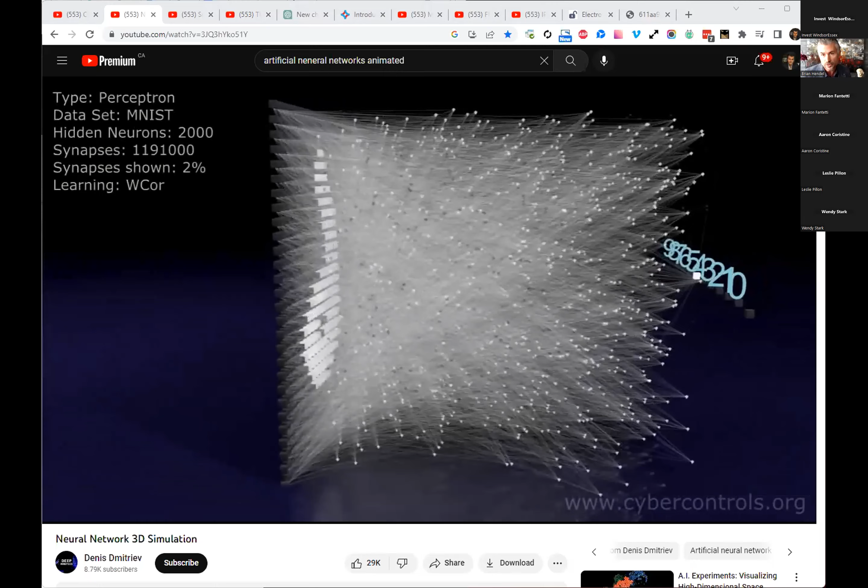So what do we mean when we say AI? Certain things humans do exceptionally better than traditional computers - we think abstractly, we're creative, we do pattern matching. So computer scientists decades ago said, why don't we try to build computers like human brains, using artificial neural networks instead of the squishy meat ones we all have. And out of that has come some pretty amazing stuff.

Probably some of you have heard of Midjourney and Stable Diffusion. This is AI generated art, truly novel creations from an AI system. This is crazy for someone like me who's used to a lot of traditional if-this-then-that type programming. We never expected creativity to be emerging from AI so early.

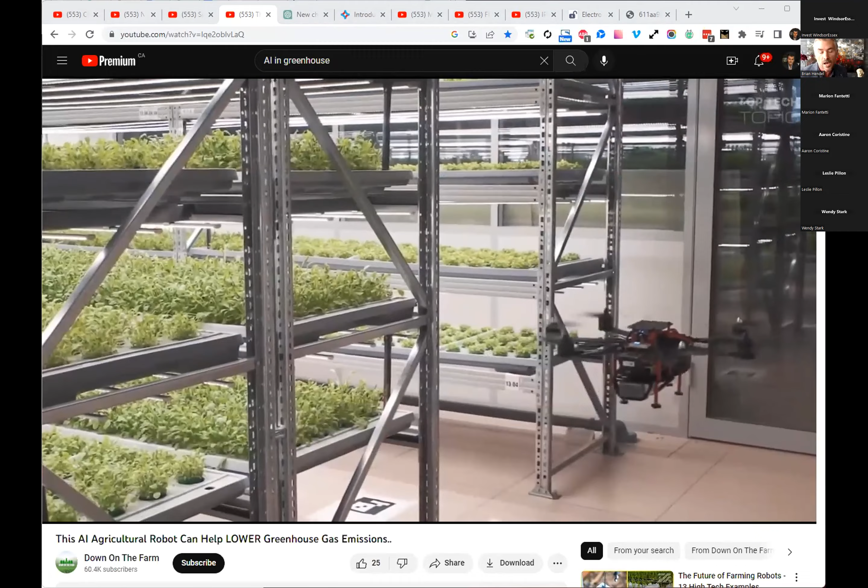So well, what does this mean for ag? Like, this is pretty pictures, that's fine, but what does this actually mean for the agricultural industry? AI is a huge term touching almost every sector right now. In the greenhouse specifically, you've got AI interacting with robotics, self-driving equipment. We see this locally at some of the bigger growers out in Leamington, automated pickers.

So things you're seeing in this video, right? But the things that I personally find most exciting are the opportunities in more of the thinking activities - things that are less robotics and more happening in the grower's brain.

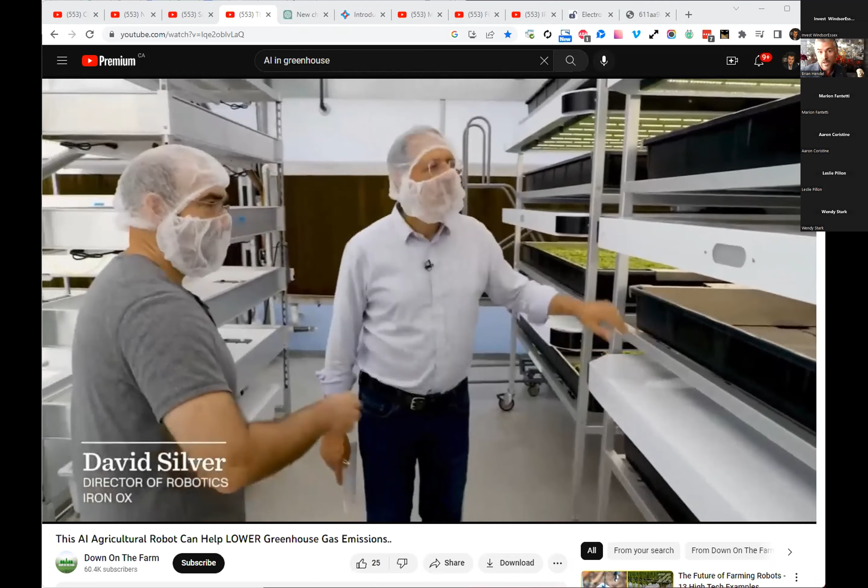I've been told there's some growers in the room, so you'd know that running an operation in a greenhouse or field takes a lot of thinking or expert activities. These involve planning and yield prediction, pest and disease diagnosis, and grower decisions like optimizing fertigation and lighting. There are initiatives underway right now to augment these experts in almost every one of these areas - in many cases to empower them, in some cases to actually replace certain human processes within the facilities. So there's a lot of exciting things happening.

But really I want to talk about some practical examples of AI around the more thinking activities here. This is fun if it's going to work. Some of you probably have heard of ChatGPT - it's what's called a large language model.

Basically, in a rough sense, this means we have a virtual brain that has been trained on a huge amount of text, research papers, articles. But I just discovered - did you know it was also an amateur grower? So let's see if we can pose it a question here. I just wrote up a question.

So: pretend you are a professional grower growing cucumbers for an industrial greenhouse. Your cucumber is at the fruiting stage, and your scouts have indicated there is powdery mildew showing up on the leaves. What would you recommend? So I'm posing this artificial brain a question now - and again, this is not an agricultural product at all, just a brain, an artificial brain that knows a lot of things. You can see it's actually writing a response in real time.

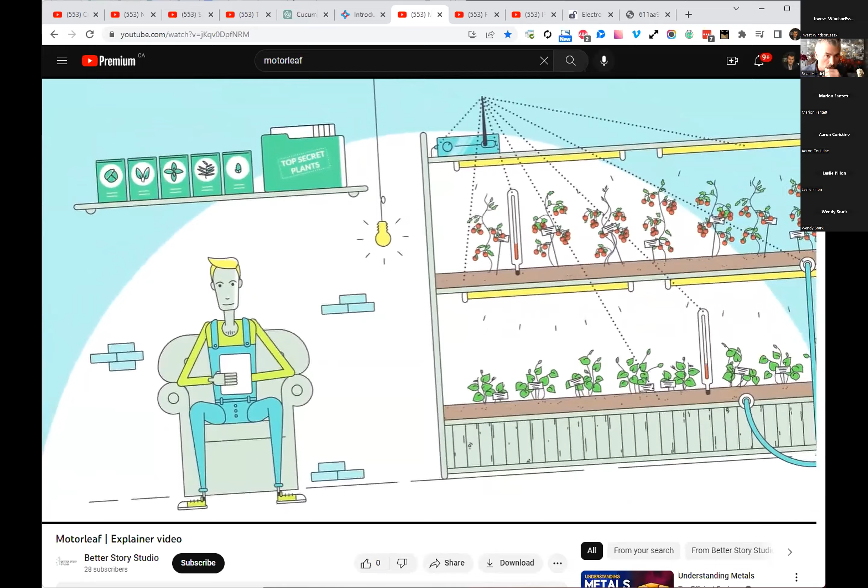An example of a product company that we actually did work for out of Montreal a few years ago, Motorleaf. This is just one practical example. It's a little more related to the back office. So the growers in this room would know farms have a bit of a problem.

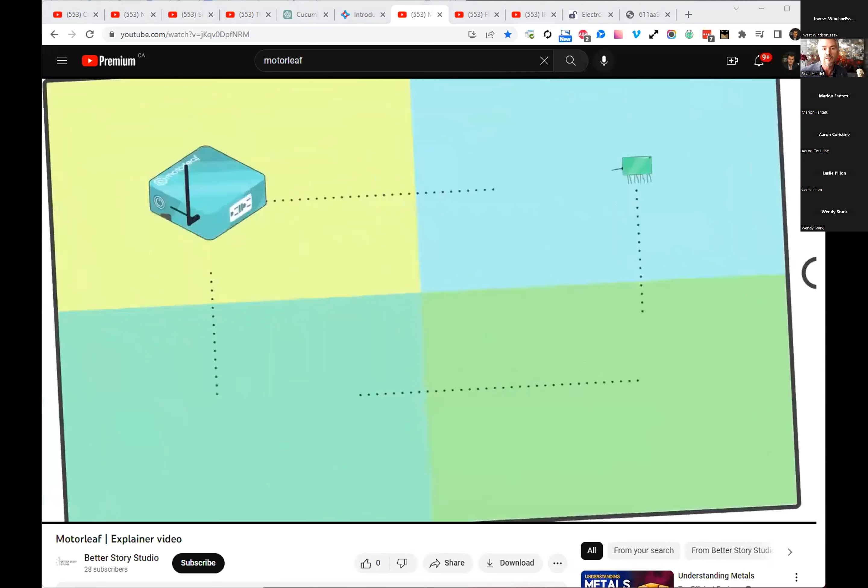They need to figure out what their yield is going to be, right? They've made commitments on contracts and they need to know what the output is going to be. So it's tough for them to do that, and they use their own gut instincts.

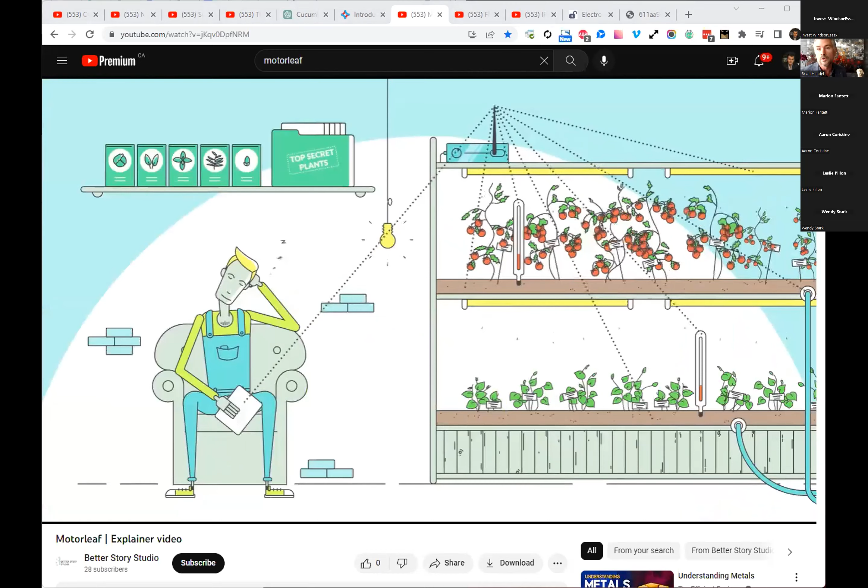So Motorleaf was one example of a product that took all the sensors within the facility, all the light information, the soil pH, fertigation, lots of historical data, and used AI to then predict yield, to give growers, to give their sales team the information necessary to make better informed decisions. This is actually honestly a lot harder than it looks.

We were kind of boots on the ground there, and we realized just the amount of raw data, the huge amounts of historical data. Any faulty sensors in that facility give incredibly erroneous data into the model, and it's really, really a problem. So there's a lot of challenges, but this work is actually happening in the field.

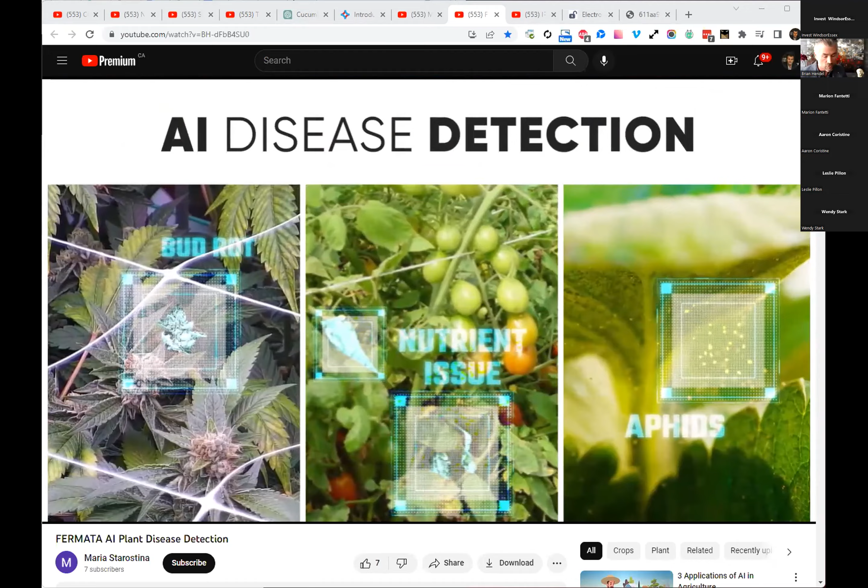Another practical example, a company that we've been in talks with as well, they're trying to install sensors, or rather cameras, all over the roof of greenhouses in order to watch the crops all day long. So imagine a grower who's looking at plants continuously and looking for signs of stress, pest detection, bud detection, if they're in cannabis, looking at where the buds are starting to exist in the field.

However, again, these types of solutions get very expensive. You have a lot of money invested in camera systems and a lot of processing power churning through huge amounts of data. We're talking hundreds of gigabytes a day. You have to then have servers on the farm because you can't move that kind of data off premises through the internet connection of a lot of these facilities.

So let's look at how AI is changing existing products. And I'm going to use an example of our product here, actually. So I'm the co-founder of IPM Scout Tech. So we built a crop health management platform for greenhouses, helping these facilities track their pests and diseases. And we've built an app to help scouts out in the field uptake their information.

So we are currently in the process of helping to detect pests automatically. So instead of having to count pests manually on sticky cards, we're working with technology that can help identify what those pests are and how many, so that they can make better informed decisions to help fight those pests out in the field.

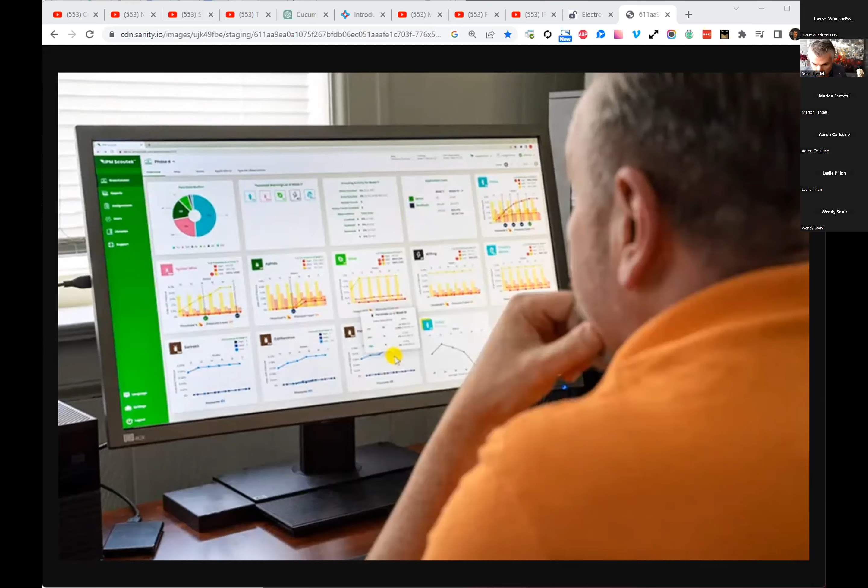I'll be honest, I've been in software for over 20 years. I've seen innovations happening all the time, but I've never seen a single major change or innovation in my field that seems like it is changing every vertical in a brand new way that has a huge potential to change the fundamentals, right? So give you some context about ChatGPT as an example.

It's still in beta. Like what you saw there is not even officially released, right? So it's writing poems. I used it to create Christmas poems for my family last year, and it was tons of fun.

It's gone from version 3 to 4 in 6 months, and during that time, cognition has gone off the chart. It went from passing the bar exam at the lower 10% to the upper 90%. Think about that for a second. This is just asking this generic knowledge base. Again, it's not an ag product, it's not a legal product, it's a generic artificial brain, able to pass very difficult human tests better than most people.

That's mind-blowing. Now it's able to accept images. So you could say, hey, I have a plumbing issue. Here's my plumbing. Can you make some recommendations specific to me? Try to imagine visualizing that out into the agricultural space. So again, just examples of where things are going, not that the product is going to specifically be used there, right?

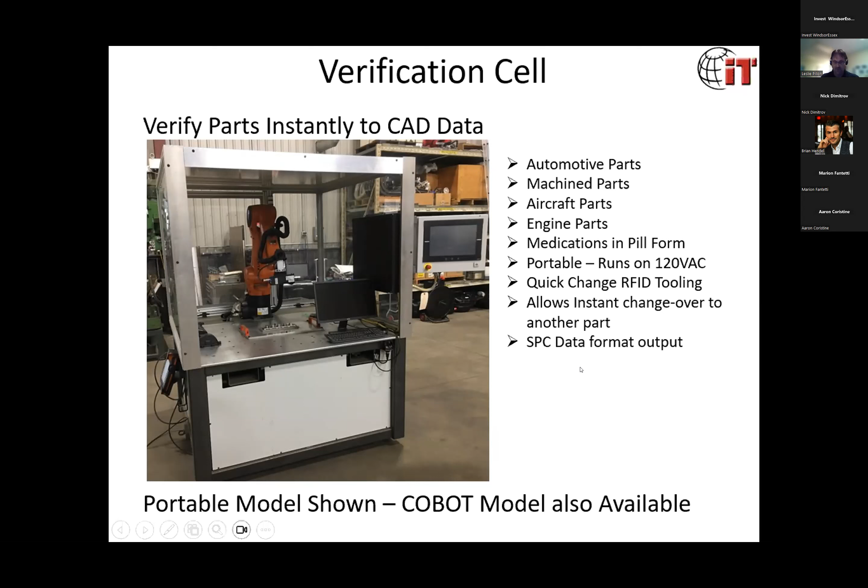So the fixture you see here can be changed instantly to run different parts. As the fixture is installed in the machine, it automatically recognizes which part it is through use of an RF tag, and the machine self-configures to that new part. Essentially, imagine a plastic injection facility during startup on a Sunday, where they have to do first-offs on the parts — CMM checks take a long time. This machine can literally do first-offs on all your parts within minutes. So it's a very cost-saving and time-saving type of product.

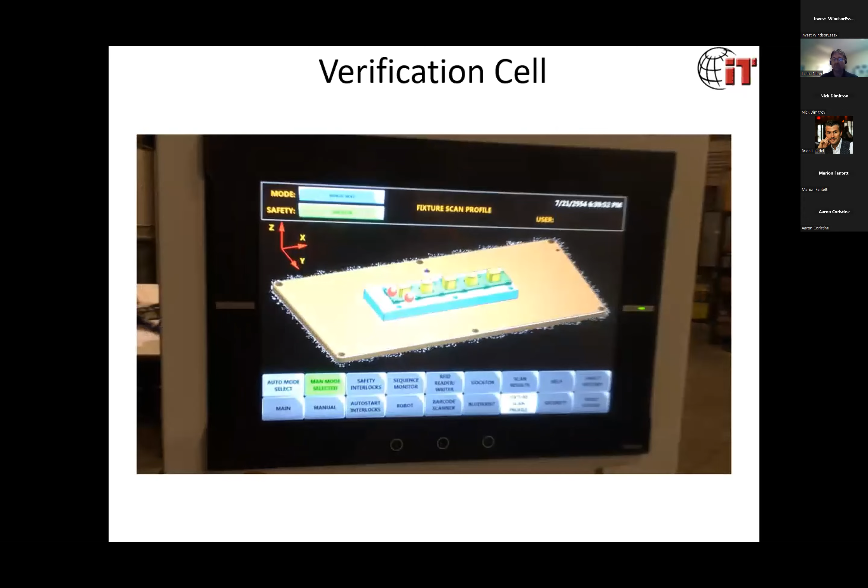This is an example of a scan. Here we have a fixture. We're scanning across it, and within seconds we'll have a 3D rendering of that part, where we can pick certain key points and compare it to the CAD data and either pass or fail on those data points.

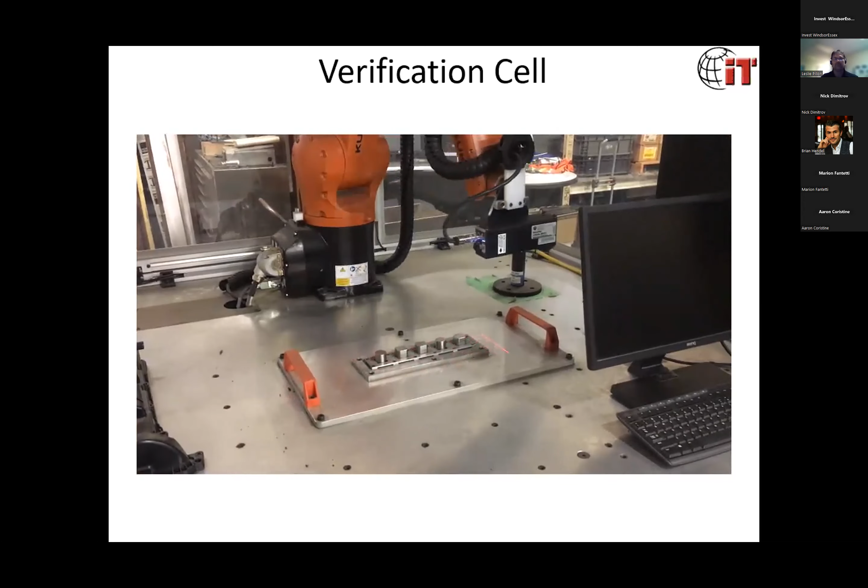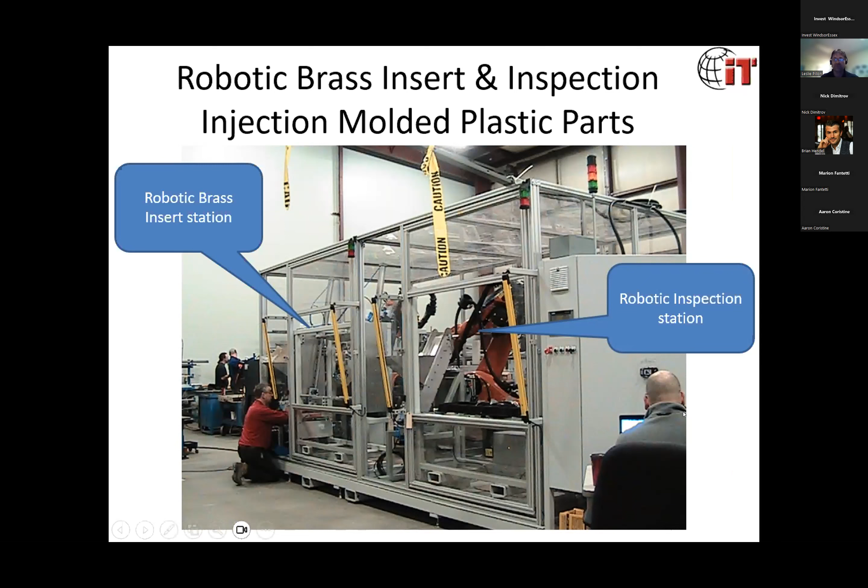Another recent machine we built is this one here, which gives you an idea of our capability at Innovation. This is a robotic brass insert cell, and it installs brass inserts by heat staking into valve covers. All this machinery is built here at our Stony Point location. We have a robotic brass insert station and also an inspection station. Two robots are used in tandem to install the brass inserts, and one station also does the inspection of the inserts. We have to make sure the inserts are not inserted too deeply into the valve cover, and are fully inserted flush — not too deep and not too tall.

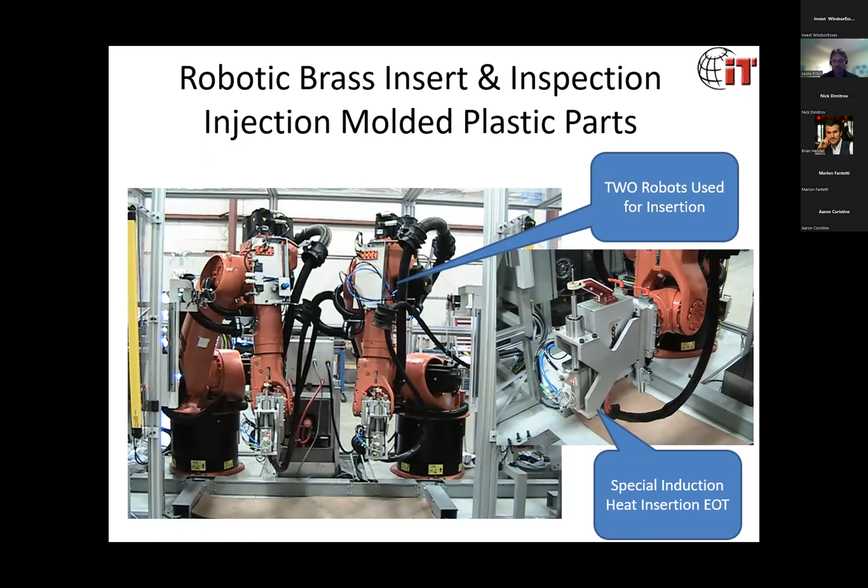The inspection station uses an LVDT to check the heights of the part. This is a video here — we've got 2 robots picking from a feeder and automatically installing the brass bushings into the valve cover.

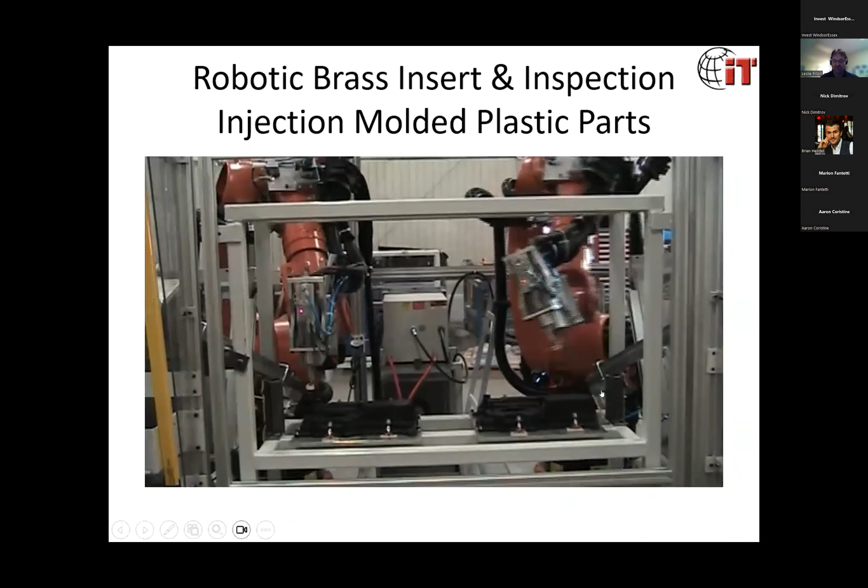So as I mentioned earlier, in 2018, we began working with IRAP, OGVG, and Automate Canada to assist greenhouse growers in preparing and evaluating feasibility of automation solutions provided by Canadian automation solution providers. Since this time, Innovation has worked on 3 major projects for the greenhouse industry, and I'm going to showcase those 3 today.

All these solutions are, by the way, patent pending. So particularly on the automatic stringing, I won't be able to show you the entire device at this point, but we can show you it in operation actually tying knots.

The first machine I want to show you guys is a solution for sorting vine tomatoes with singles. As you guys know, it's very important to match exact weight of shipped tomatoes.

In this example, it could be cucumbers as well. When we're shipping product to the customer, for example if we're shipping 1 kilogram of product, we don't want to give them 1.1 kilograms, and we certainly don't want to give them 0.99 kilograms either, because we're going to get stung. The customer is going to penalize us for being underweight, and we don't want to give them overweight either, because that's coming out of our pocket. So this machine here is a robotic solution to basically marry single tomatoes with vine tomatoes.

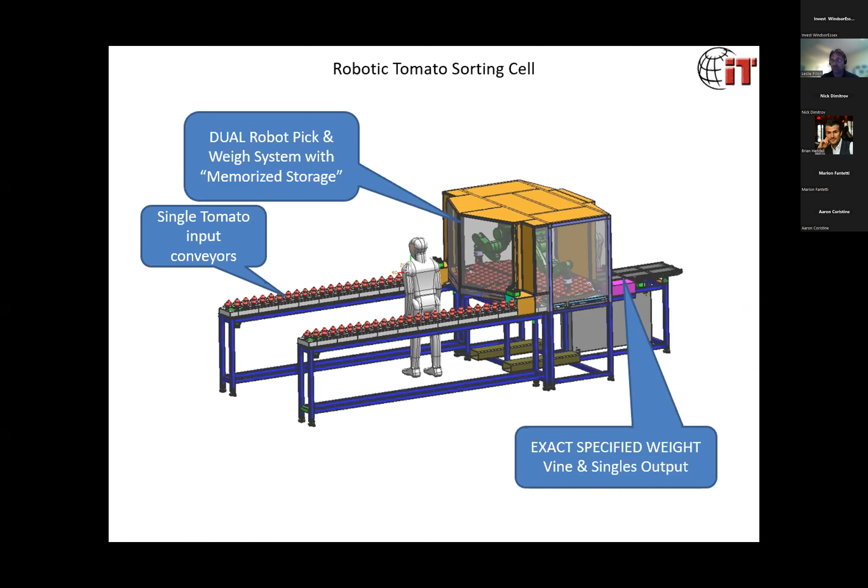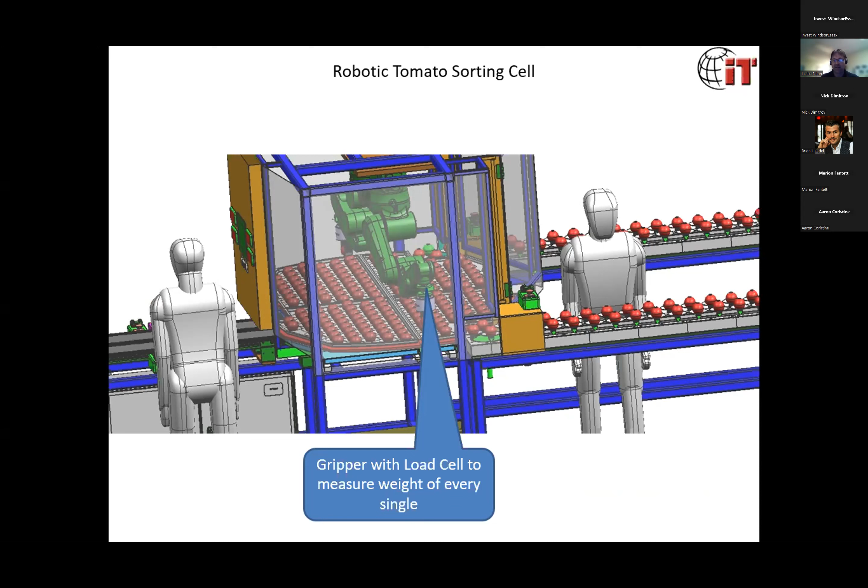So on the grippers of the robots, we have a load cell to measure the weight of every single. The operator on the exit side places an empty tray with a vine on the scale, and the robot will pick the exact single or singles to make sure that the weight of the package equals our desired weight.

There's a shot of the load cell and a special gripper. Here's a video of the actual gripper that we developed. As you can see here, we have no problem at all grabbing the tomato. We can pick it up, we can set it down. We're not damaging the flesh.

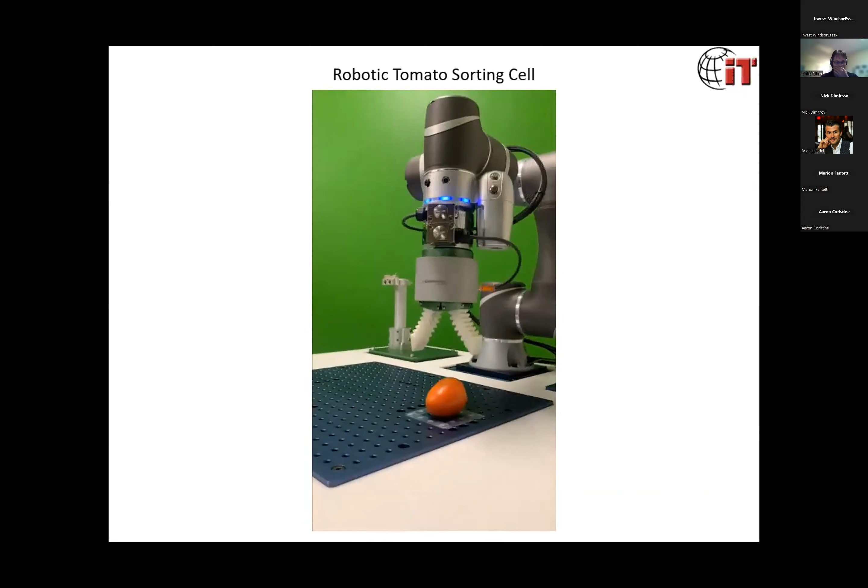Overall, this can operate with as little as 1 operator, depending on how fast you want the throughput to be. But in this case here we have 2 operators. So this operator has singles from the storage and is loading singles onto the input side. These can be green or red, by the way. You can sort green or red or both, and you can use 1 lane or both lanes. You can choose — the machine is totally configurable.

Vine stock is over here. So the operator grabs the vine stock, places it on the scale, and then the robots automatically marry that package with the correct singles.

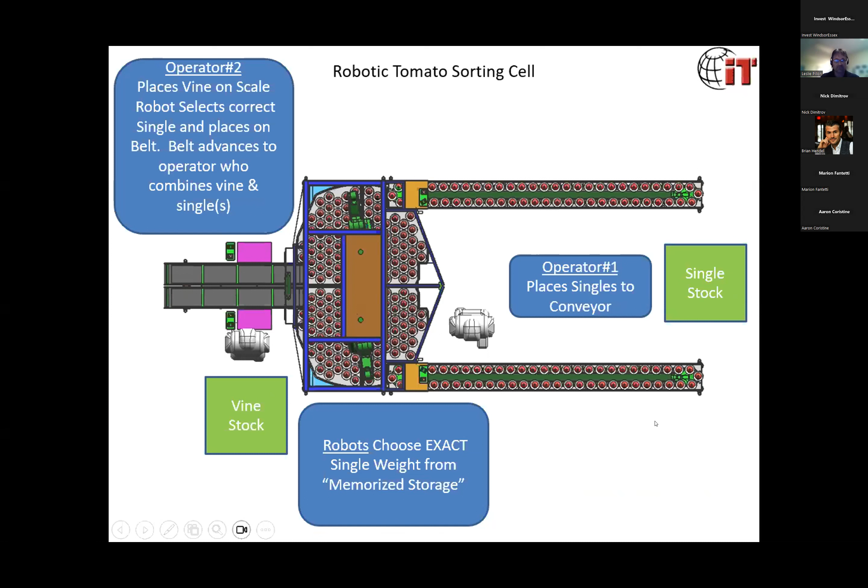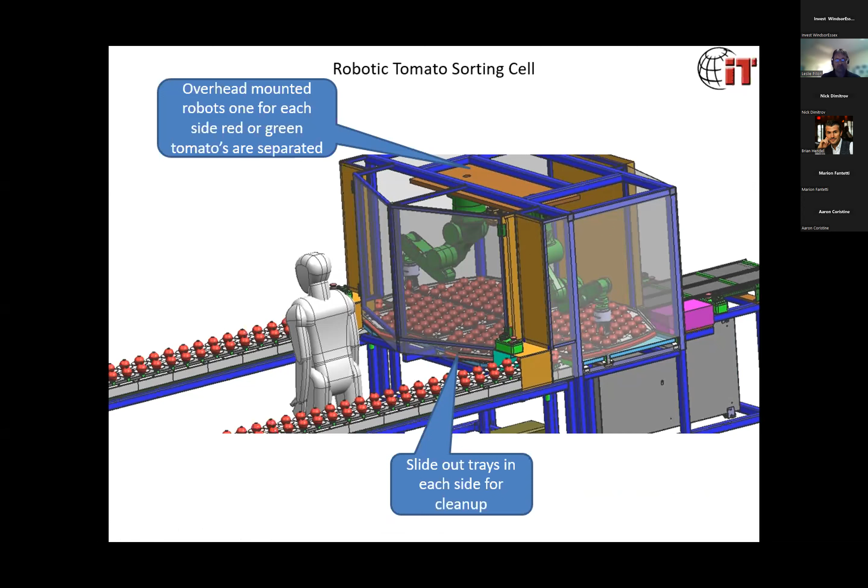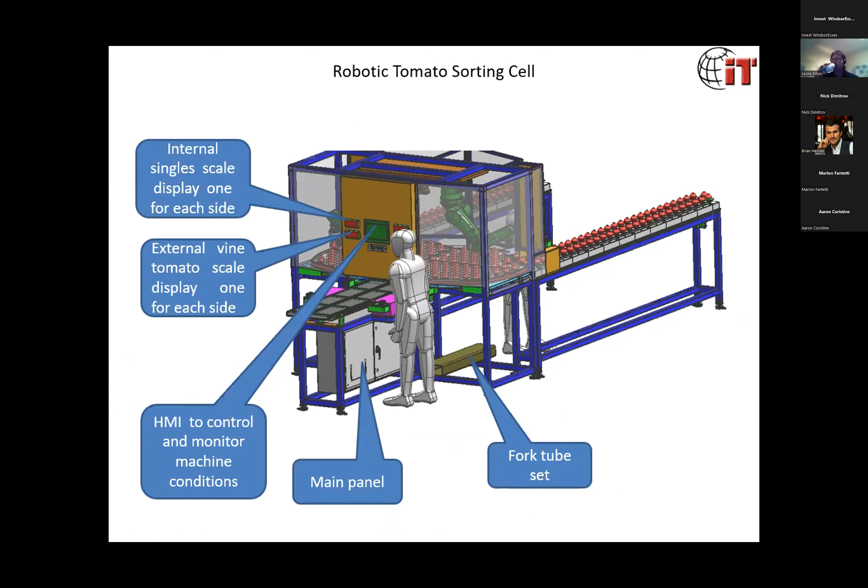So we have a control panel, human machine interface, the scale adjustments, with a panel located below with your controls and your PLC. There's a fork tube set, so the machine is portable — it can be moved basically anywhere you want. There's a scale for each side, so you can run with one operator on one side or two operators, depending on the throughput you desire.

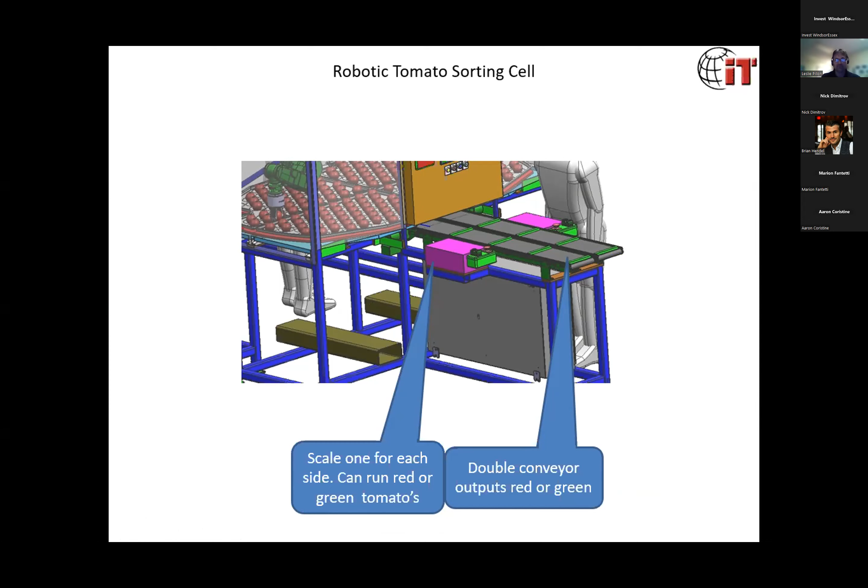One other major feature of this machine: we have an overhead vision camera to monitor the contents of the trays, and that's important so we keep track of the fruit that's in the trays in case there was ever a mix-up. Basically, we want to make sure that if there's any misalignment of tomatoes in this case, that we detect that. We can also use the camera to detect the quality of the tomatoes and the ripeness.

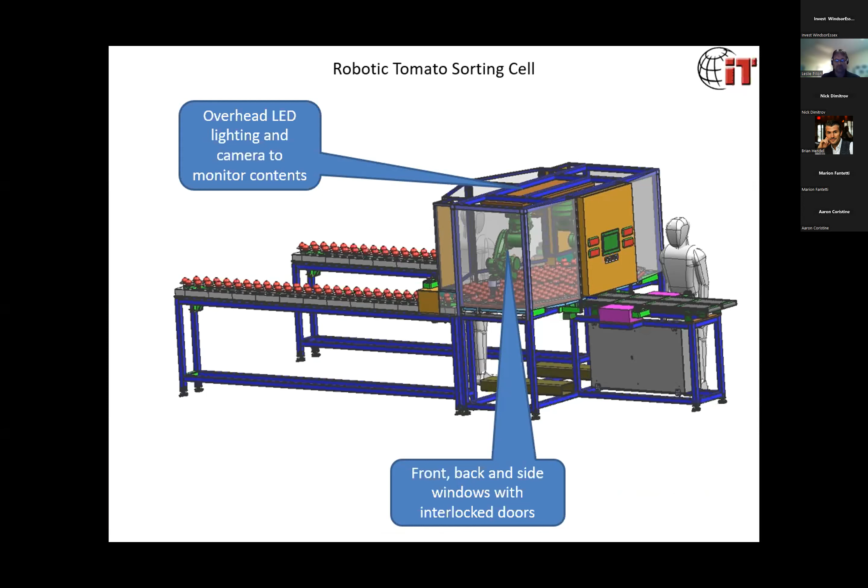Underneath, we also have trays for cleanup. The trays come out, and there's actually holes in each storage location, drain holes, so the machine can be completely disassembled and cleaned when desired.

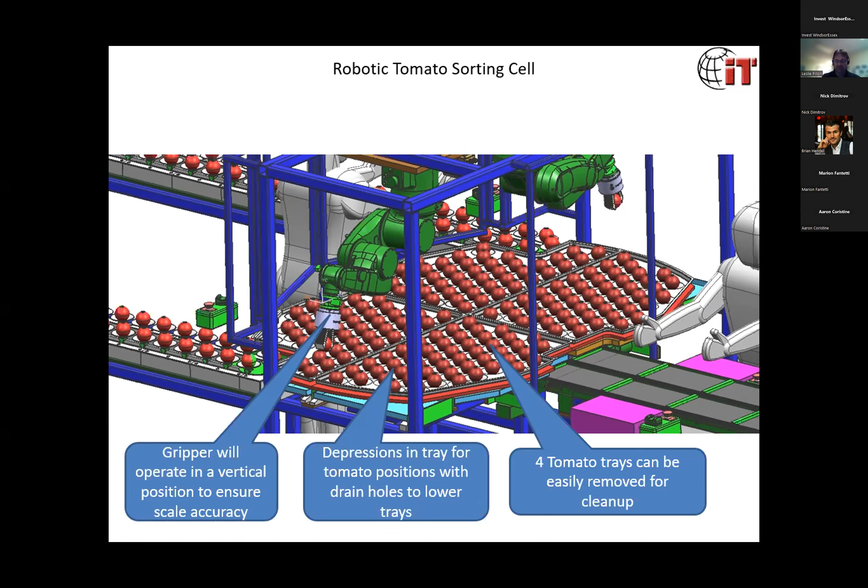Advantages of this machine: requires less manpower for exact weight sorting and packaging of the vine tomato. The system can operate with 2 operators. A third operator can be added to increase throughput or 2 colors. We get 100% sorting with no mis-sort or rehandling. High reliability — robots are performing the handling and the weighing of the singles. Very few moving parts require maintenance. The vision camera constantly validates the tray contents for mislocation. The floor space footprint of the system is very small.

Multiple systems can be deployed. Flexible tooling can be changed over easily, meaning the system can process different vegetables. For example, it could be changed over to process cucumbers.

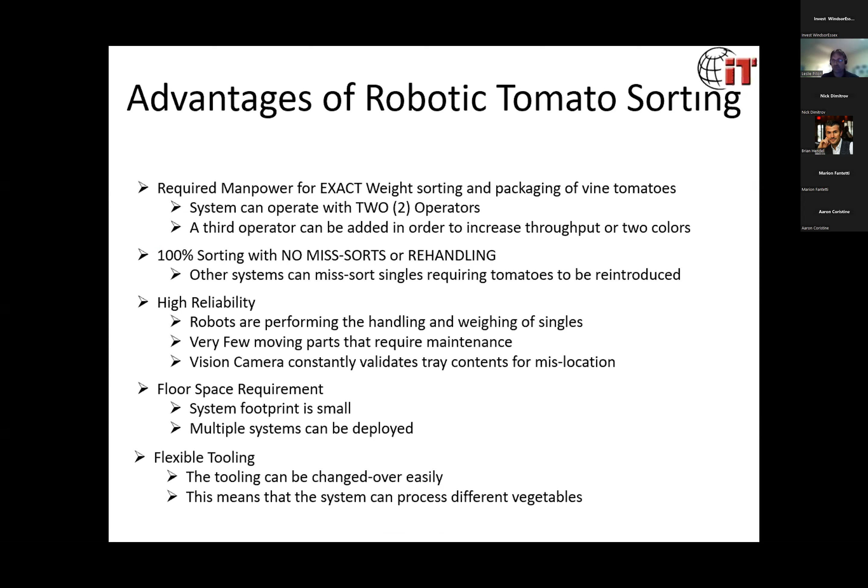The next solution I want to talk about is lighting covers.

We heard, and let me just say thank you to the growers for letting us into your farms to understand your businesses and how automation can assist you in your efficiencies and cost effectiveness. We've learned a lot from you guys about different things you require.

One of the things you told us was that bagging the light fixtures for spraying operations was very labor intensive and takes a very long time to bag all the lights. Why do we bag the lights? Because we don't want overspray to damage the lens. These lights are very expensive, and we don't want the surface or lens contaminated at all.

Typically the lights are pre-bagged manually with plastic bags, which as you can imagine is very labor intensive. So we came up with these light covers that swing in and out of place to cover the lights during spraying operations. It's a very simple device.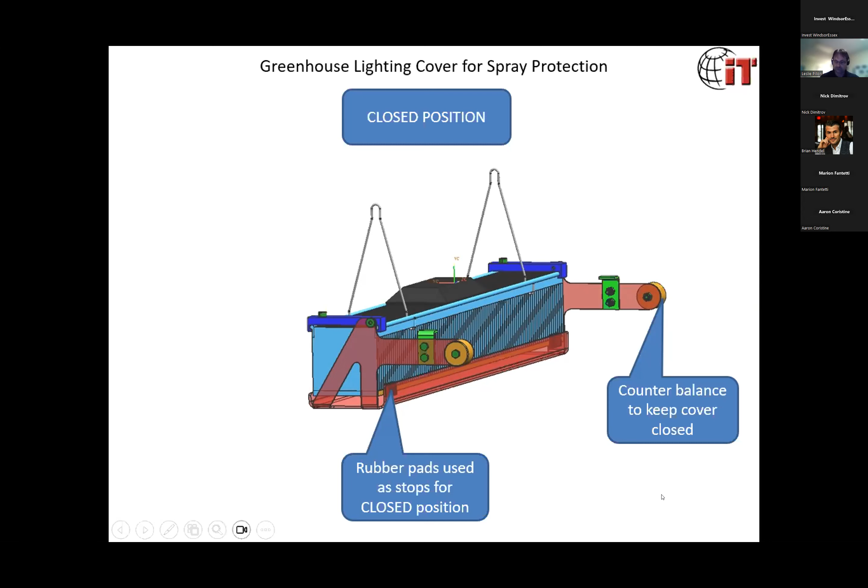It has a counterweight to hold it in either position, open or closed. So this would be the closed position, and that's the open position. The cover does not impact the hangers whatsoever.

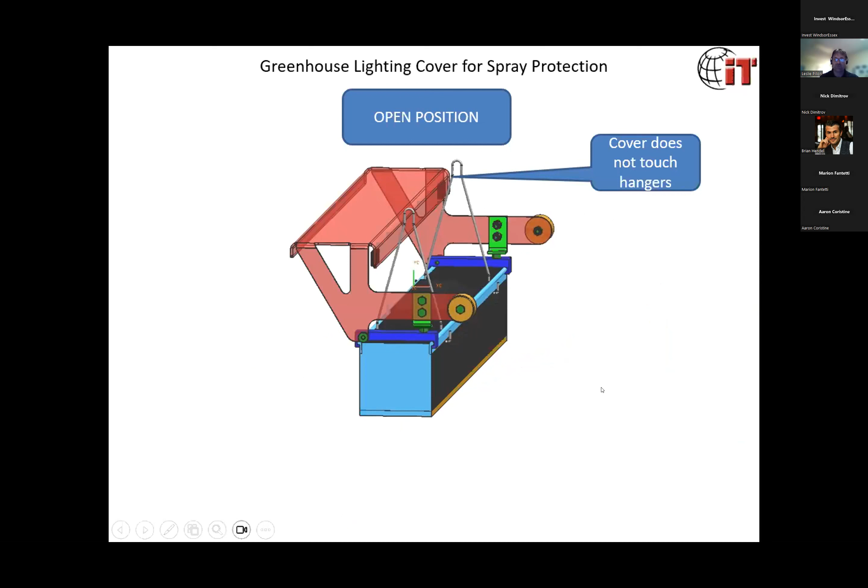Advantages of the light covers: reduced risk of damaging the lens surface, time to cover the lights is dramatically reduced, permanent installation so no storage is required, and less waste material, nothing going to the landfill.

Automatic operation: we are working on a cover that can be opened and closed as a bank of covers using Bluetooth. We envision being able to open and close your covers in banks at a time using a smartphone app, so you don't have to physically use an actuator to open and close the covers. With our actuators shown today, they're manually opened and closed, but we envision this could be done automatically.

The third innovative solution I want to talk about is automatic greenhouse stringing, a project we've been working on most recently with IRAP, who have helped us immensely with resources and funding.

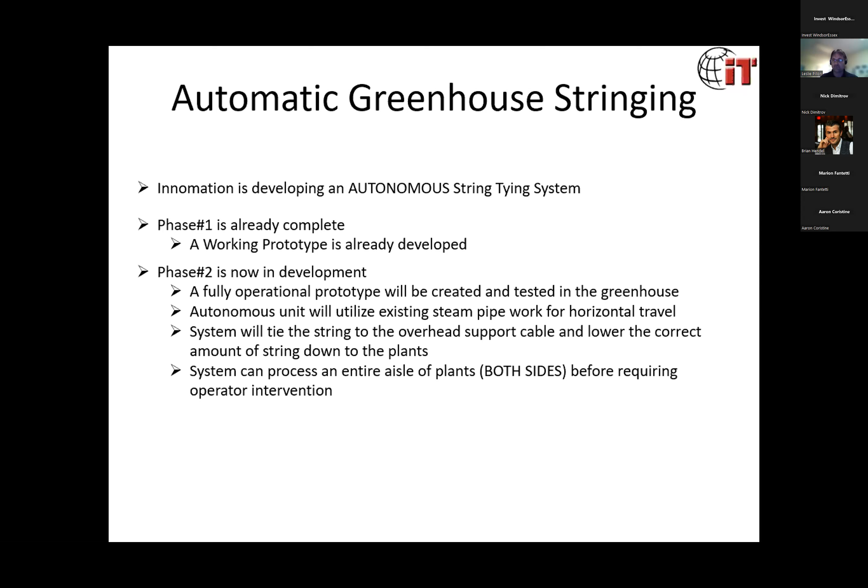So this is a typical greenhouse here. You can see the vine strings hanging from the wire overhead, and we also have our steam heating pipe work on the floor here.

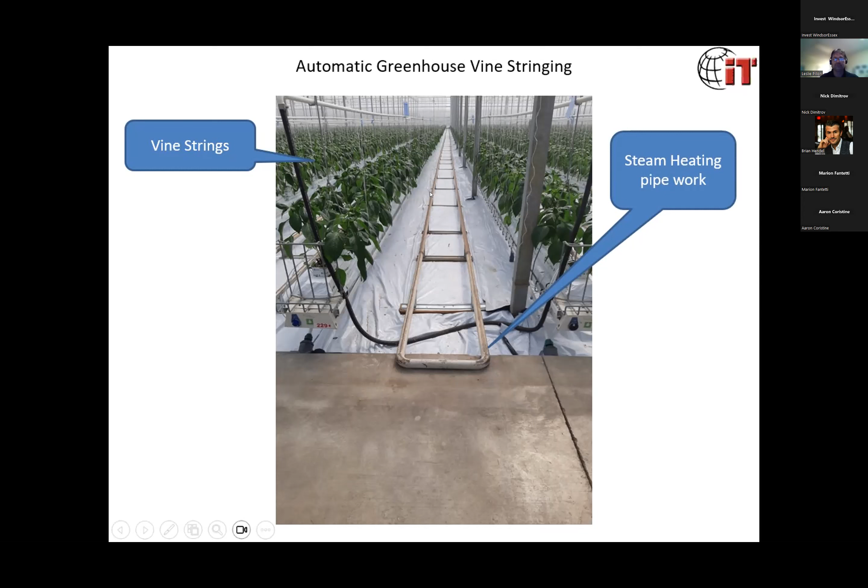Another shot here shows the overhead support cable running along the length of the aisle on both sides, and here's the LED lights I showed you earlier.

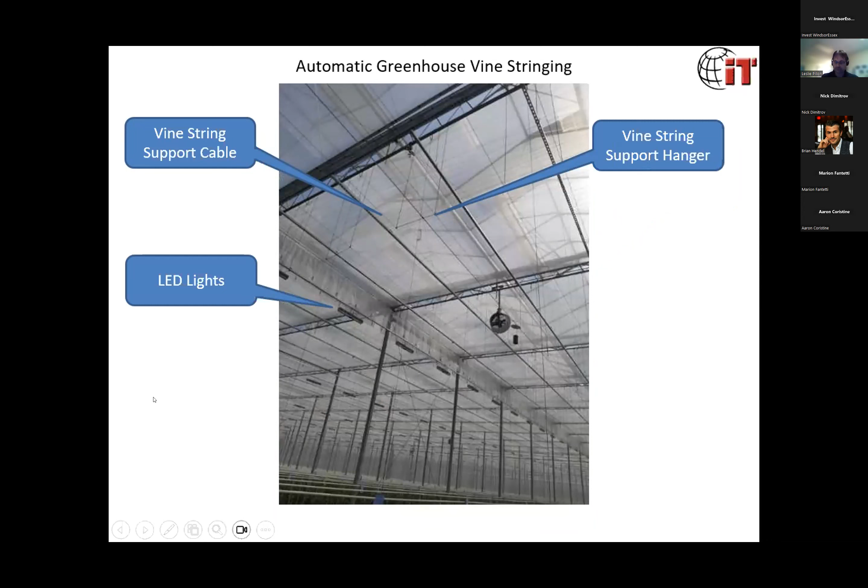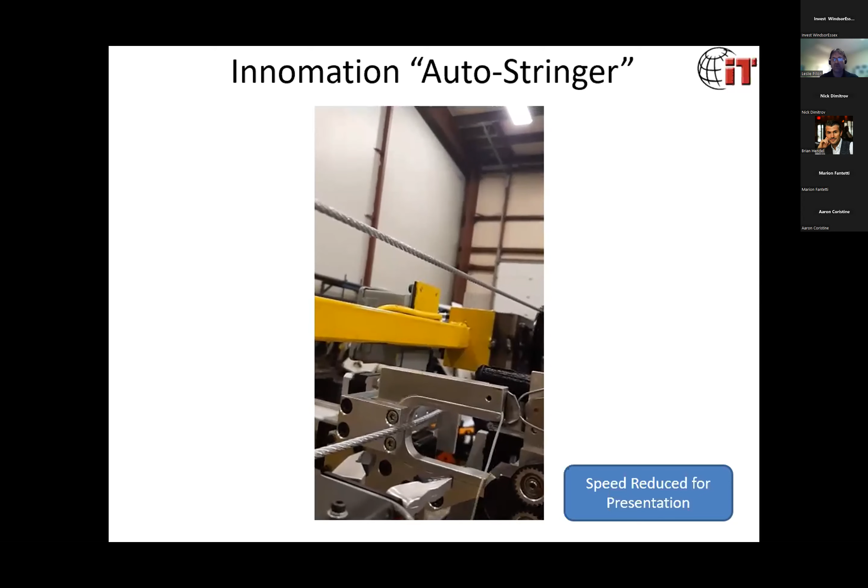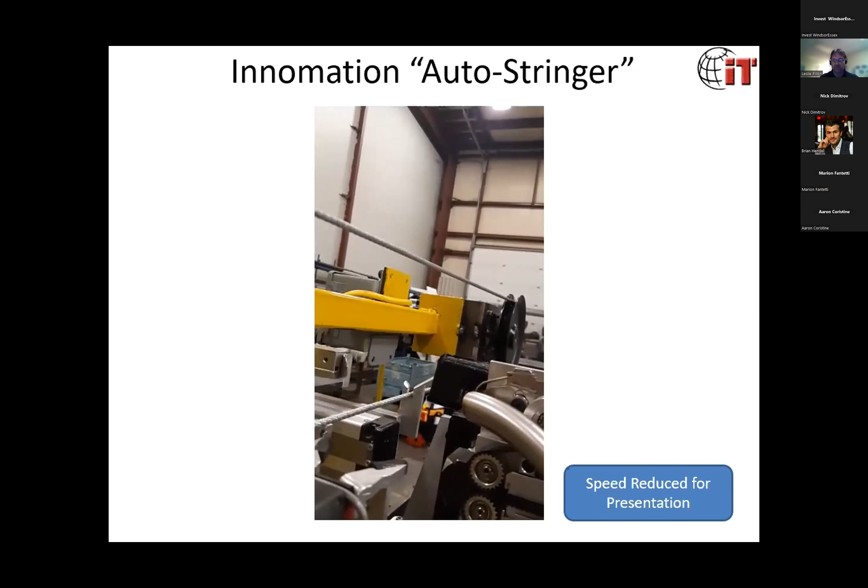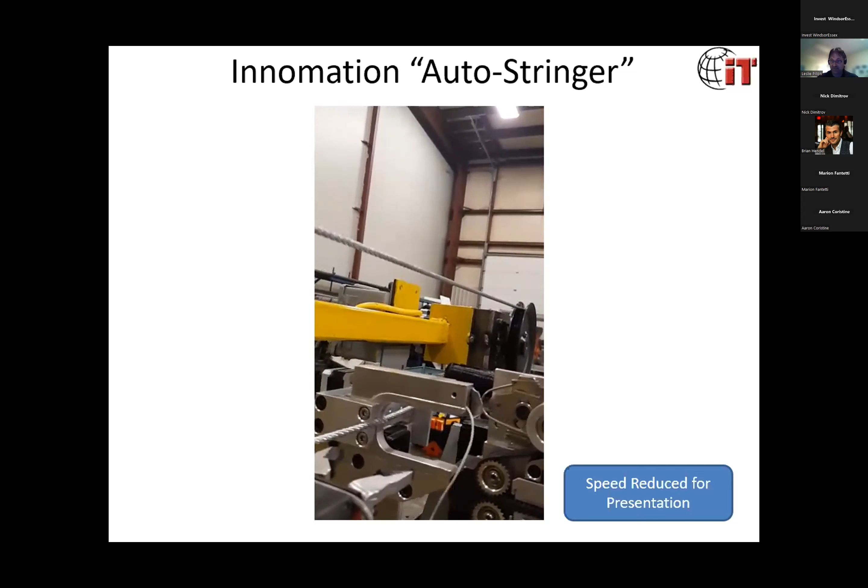Here's a video of our tying strings, slowed down for demonstration purposes. Here we show the support cable and our device tying a knot. In this case we're moving the wire instead of the device, but the device will obviously move along the aisle. The distance between tied strings and the amount of dispensed string at the end—you see it when it unrolls—is all totally configurable.

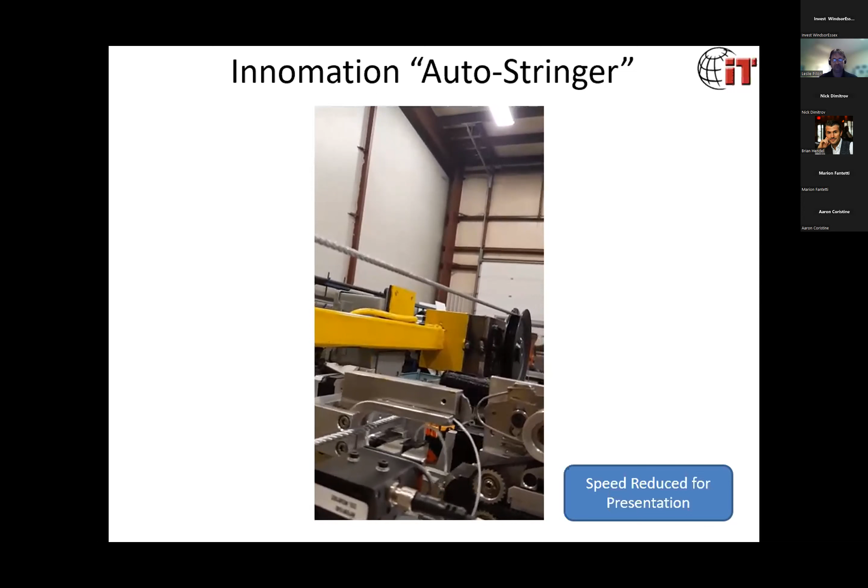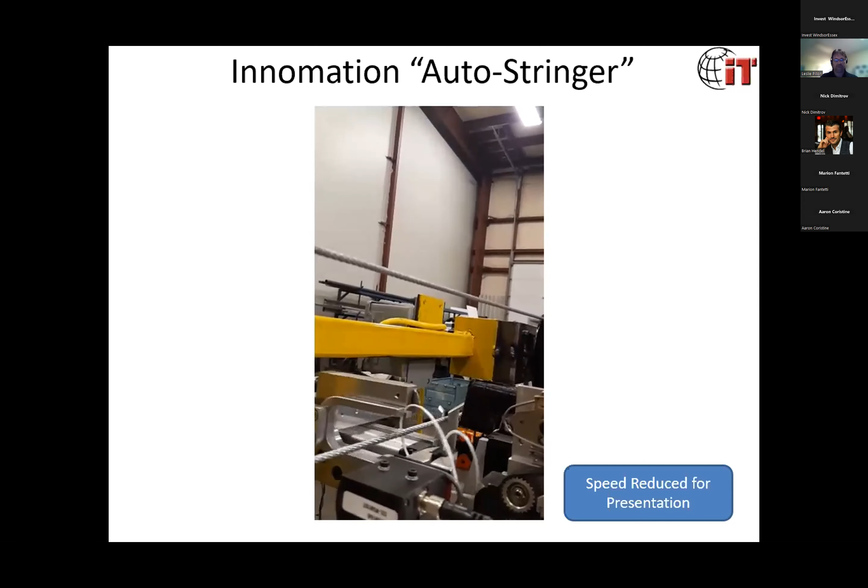I'll show you one more cycle here. Here's a number of strings we tied during that video. As mentioned, the distance between the tied strings and the amount of dispensed string is all totally configurable, because the system cuts off the string at the desired length, and we can configure that length to be any length we want.

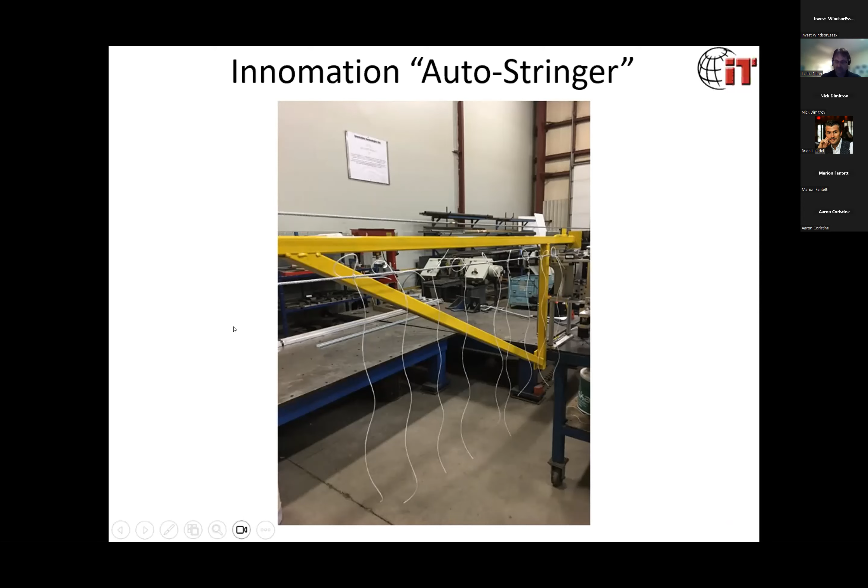This is a close-up of the tied knot. It's a half-hitch slip knot—there was some question about what it was called, and we learned from the growers that's what they call them. Basically it's easy to untie: you just pull the one side here, and the whole string comes down.

So the advantages of the automatic stringing, obviously, the system can operate with or without an operator. Basically, the only thing the operator has to do in the beginning is start the system on the aisle, and the system will complete the tying on both sides of the aisle automatically.

The working conditions for tying strings are very, very difficult. It's very hot. The workers can only work a certain amount of time and tie so many strings before they have to take a break.

The machine will tie knots more reliably. The strings will always be the same distance apart, and they'll always be the same length. And as I mentioned, the length and spacing between the strings is fully configurable.

Dennis, do you want to comment on the string and the special research we've been doing on string for manual tying versus automatic tying?

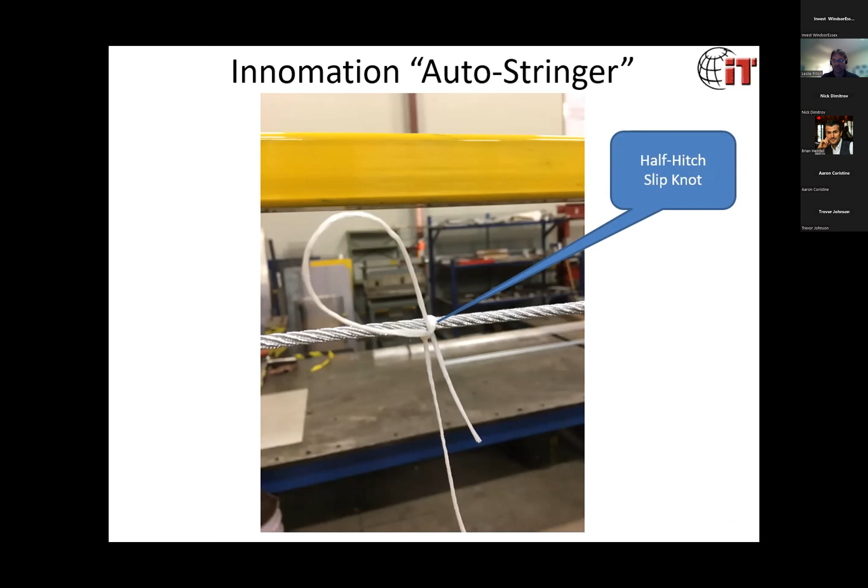We may work with Konrad, that was the next presenter. He has a very nice unit that he developed for already traveling down the aisles, and so we're going to entertain that possibility. So I'm sure that you guys are going to like his presentation, which is coming up next.

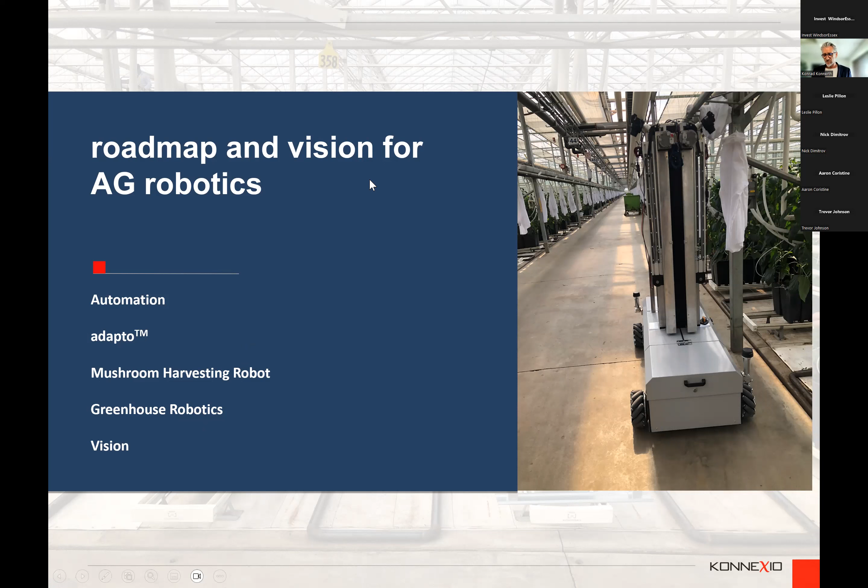While I'm going through this, I want to show you the justification for why I think we can provide some valuable input to the agricultural or greenhouse automation side. I'll take you a little bit through our history to show you how this all came about, that we reached this part, and then what is our vision from here? Where do we think we want to go as a company and as an industry?

We basically started not unlike Innomation in the custom automation field. We've been 20 years in business now. I myself have been in the automation industry since the late 80s, hence my gray hair. I came over from Germany at the time, and I started a North American facility for a German machine builder that ended up not staying in Canada. They closed the operation, but I did stay, and so I started my own business in 2003, building custom automation.

But from the very beginning, we always saw a need to change the automation industry somewhat. Automation, as you know, especially in automotive or auto products manufacturing, is very much dedicated machine to one specific product, and what happens is they are very much custom engineered. Basically, you design the specific machine for one specific product for one specific customer, which of course is very hard to do—every project, every application, every requirement is different.

Some customers want something rather cheap and dirty, some customers really pay attention to a lot of high-end input that has to be in there—all different requirements, and sometimes as a machine builder it's very hard to fulfill all those things. Let alone, when it comes towards the end, all the programming and items to make the machine actually work, where it becomes more difficult to get all the programming without bugs—well, never really completely without bugs, but at least to a good working method within an acceptable range that we can ship it.

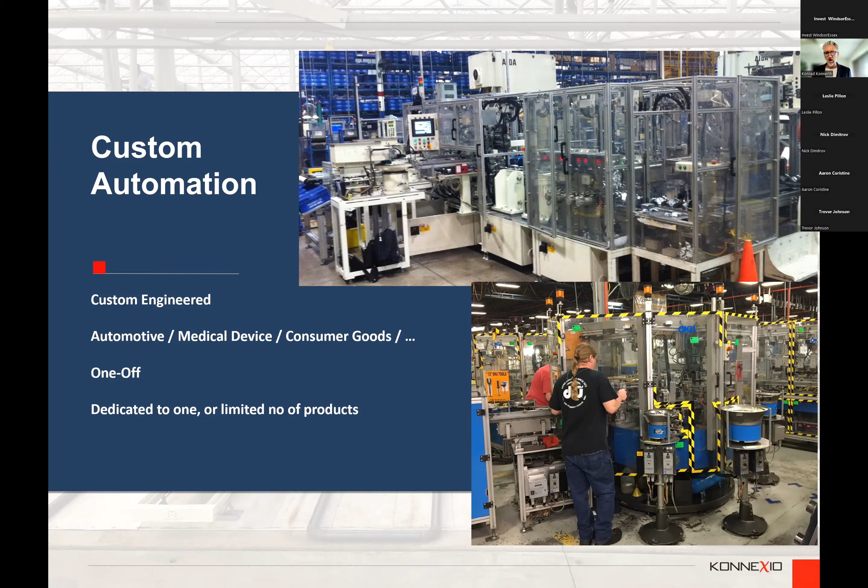So with these one-off kind of scenarios we initially had to work with, from the very beginning we always thought there must be a better way. We thought about a platform—how could automation be more platform-based, more of a system, where our goal, our dream, is that the machine is 70 or 80% standard systems. It's pre-engineered, it already has a PLC and programming built in. We've already pre-built those things, tested them, did life cycle testing, and now we know exactly what's coming out of it. The ambiguity of a custom-built machine is pretty much gone now, and we can rely on much better output and performance.

So our systems, as you see here, look vastly different now. The cells all very much look alike, the internal tooling is all different—obviously they all do a different thing, every cell has a different kind of requirement, it's all tooled differently, but yet the heart of the system is all very much alike. And we actually managed to achieve that through a platform automation approach.

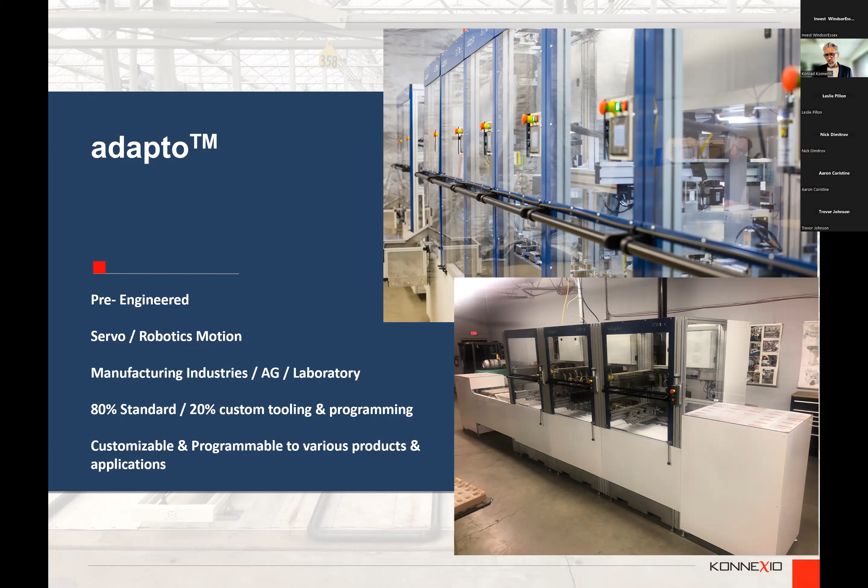So we liked that industry. It was nice, but then at some point in time, we stumbled upon a partner of ours. They wanted to do mushroom harvesting. So they said, could we not automate the mushroom harvesting? I can't show you many pictures in there that are proprietary, but we helped them develop the first robotic system from the same kind of idea.

What is our experience level? How can we pre-engineer something and pre-build something that can then afterwards be adapted to a specific application? And so we liked that industry, we thought that's kind of nice. We again didn't start that - a partner of ours came to us, but then we took it from there.

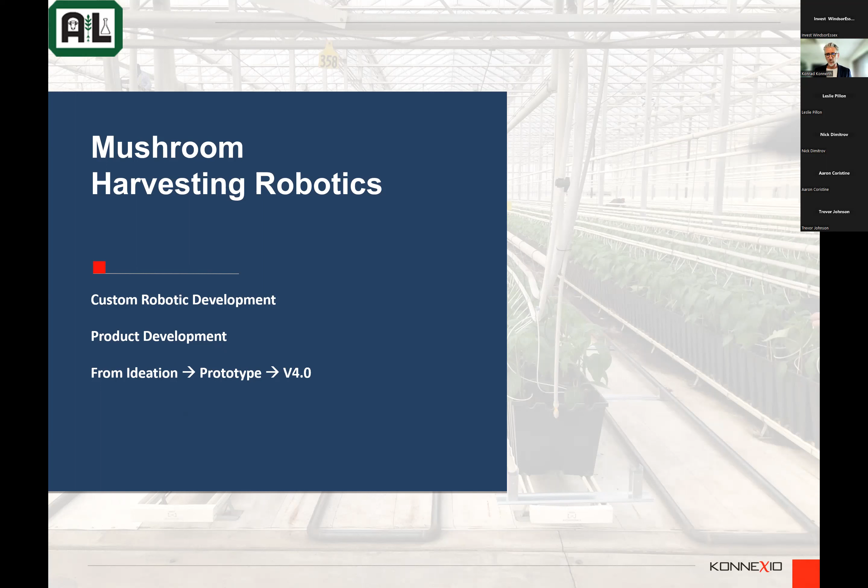And thanks to IRAP and their great support in many different ways, they actually helped us both. They posted projects to us and said, hey, could you guys do this? Could you guys do this? But also helped us and supported financing some of them. So IRAP has been a great source for us in many different aspects as a business partner.

And then we started thinking about greenhouse robotics. So we thought, okay, how could this actually look like if we try to come more from the platform approach? Rather than custom building everything individually, our dream was always more like to build a platform for robotics that can actually be used for many different applications, not just for one specific one.

And here you see a few pictures. Obviously these were the very first early stages, and they were kind of interesting, but it was all helter-skelter, all kind of just 'get it to work,' see what we can do, see what we need to learn from it, see what we actually have to iterate and make it better, basically.

But it was for us always very important to get very quickly into the greenhouse and try things early, because at the end of the day, we are actually engineers and not farmers or growers. So for us it's sometimes very difficult to understand why growers do things in a certain way. So we had to learn all these things, and we wanted to do this as quickly as possible, not trying to develop a product that we thought it should be, and then get to the greenhouse and have them say, that's not going to work because of this and these applications.

So very early we went to the greenhouse. We made sure that our track system worked. We made sure that our rover could drive. We made sure that the operator could handle it and could move it around. So all these things we've done, and we kind of started with a simple process, a minimum viable product early on to test these things out.

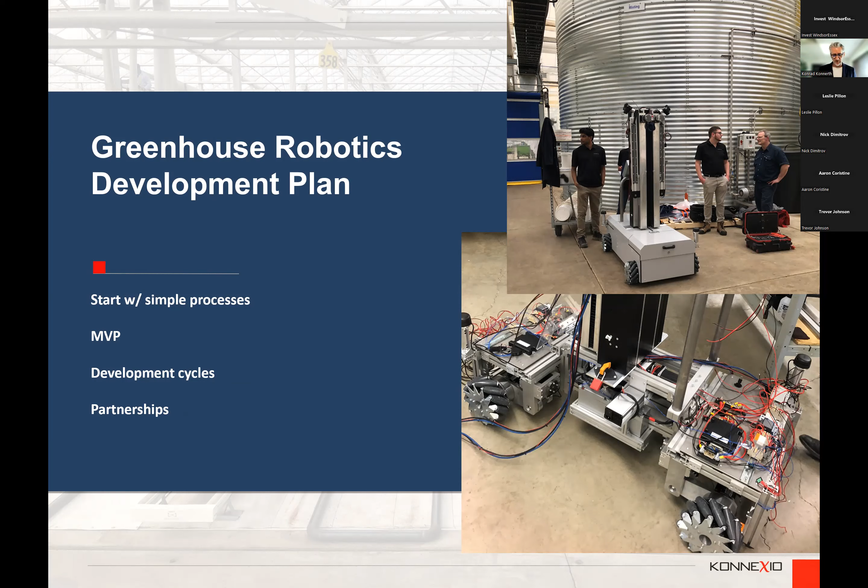And then we kind of planned in development cycles. So now we wanted to always get better and better and do more. And one of the other things we saw from very early on is that we wanted to develop partnerships. We don't believe that we can do it all on our own, nor do we want to. But it was always very important for us from the very early stage to actually develop partners who can bring specific agricultural greenhouse automation knowledge to it, so that we can actually partner with them and build with them together.

So we thought a little bit about where's our strength, why do we want to enter this industry, why do we want to get in there? And for us it was clear that we are very good when it comes to motion, robotics, handling of certain components, and the whole material flow. Material has to flow as well in the greenhouse - you have to get the products from the harvesting to the packing, you have to make sure you handle all these different applications. So we knew we can do these things. That was what we're good in.

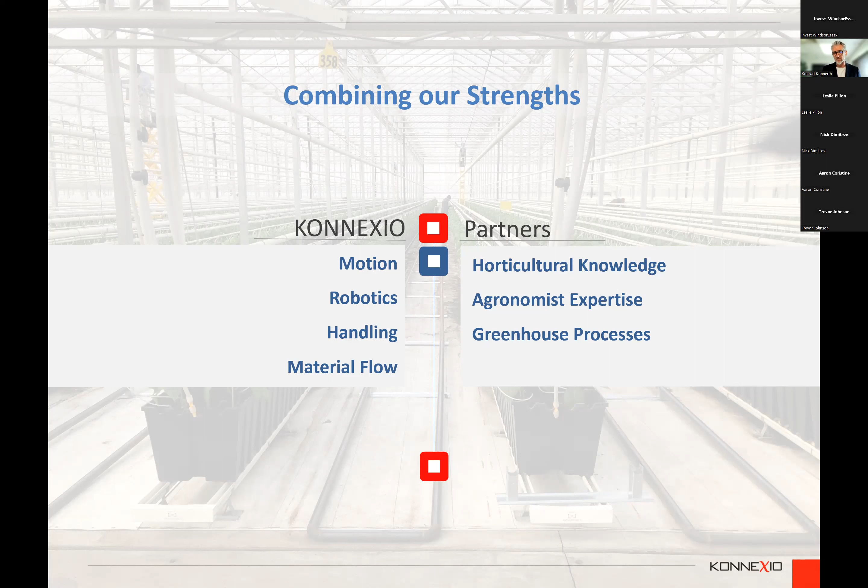What we're not really good in is that we're not really horticultural experts. We don't know much about these things. We're not agronomists, we don't understand many of the greenhouse processes, and that's where we wanted to learn from the farmers or growers, but also learn from or work with other partners that can bring specific applications to it. So we started developing a rover, a base, that has some very specific tangible benefits to it that we kind of thought of from the very beginning, or more or less developed while we were in the early stages at the greenhouse.

So our robot base had to be omnidirectional. That means, we know a greenhouse is sometimes tight in space, so how can this rover actually maneuver in the greenhouse very agile, without needing much space to drive around or have different arcs to enter into an aisle, into a growing aisle also. It had to go seamlessly, driving both on the pipe rail - we saw a picture just a little while ago from Innovation about how the rails are looking like in the greenhouse.

And you see some of them here in the background as well. So getting onto the pipe rail, but also driving on the concrete, it had to be seamless. It had to be no adjustment there. It had to find itself onto that. It had to be a solid base.

We do think we have to carry somewhere in the neighborhood of up to 200 kilograms. We're thinking of, for example, stringing, harvesting, where there's going to be robots, arms, for example. So we want to make sure we're building something that's solid and strong enough to handle these applications. Of course, it had to house its own batteries, its own controls, so all these things have to be built into the system.

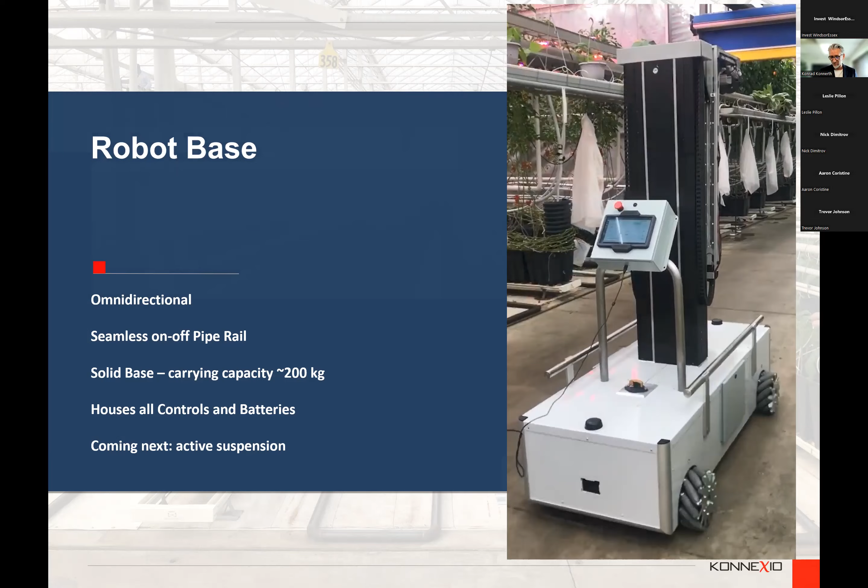Here are a few pictures of the rover, how it's actually been running. The first one here on the left-hand side is it starting up - there it is, so it's being shown how it drives sideways, and then it's rotating pretty much on the spot. So it doesn't have any curve radius to drive, so it's easily maneuverable.

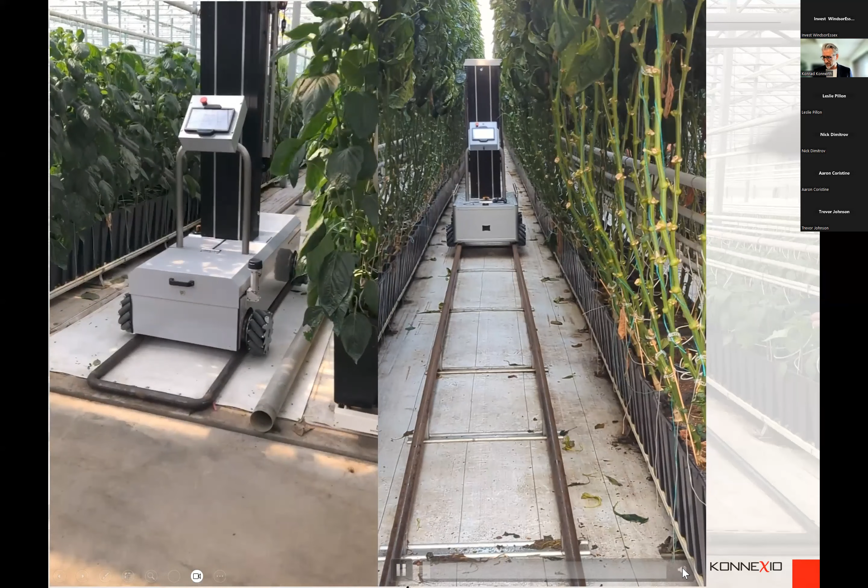And then it can end onto the pipe rail, still going sideways, trying to align to the pipe rail. And then it goes forward and just enters into it. You see it was not fully aligned to it 100%, but it was good enough that it would find itself on - so we have some allowance in there that would allow the rover to always find its way, within limits, obviously. And here's a little bit of video of how it's actually running while it's coming back to the front of the aisle after it's completed the task. I'll show you more later, but this is basically the return speed when it comes back after finishing the aisle for this specific task.

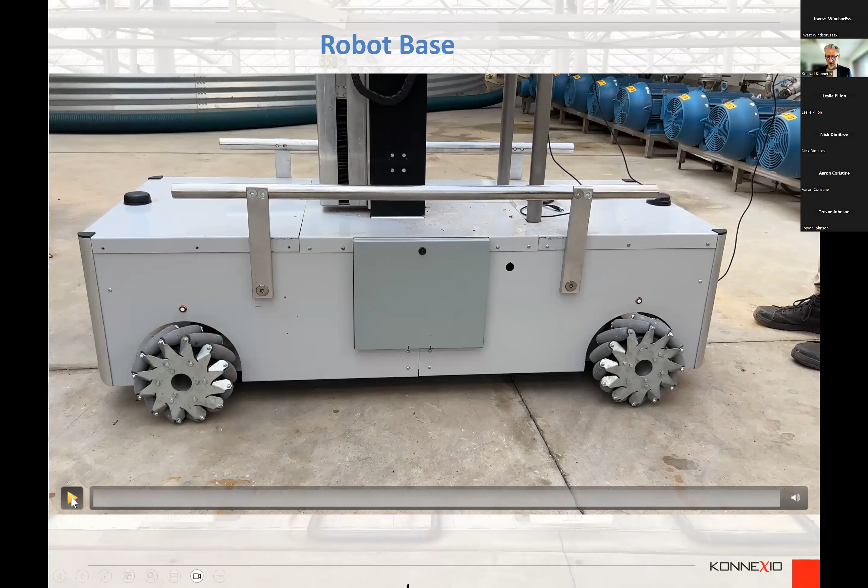So here's another quick picture of the speed. It actually can go even sideways - it's kind of nice, so it moves quite fast in side speed. I hope the video came across well, but that's kind of how it's seemed to be acting.

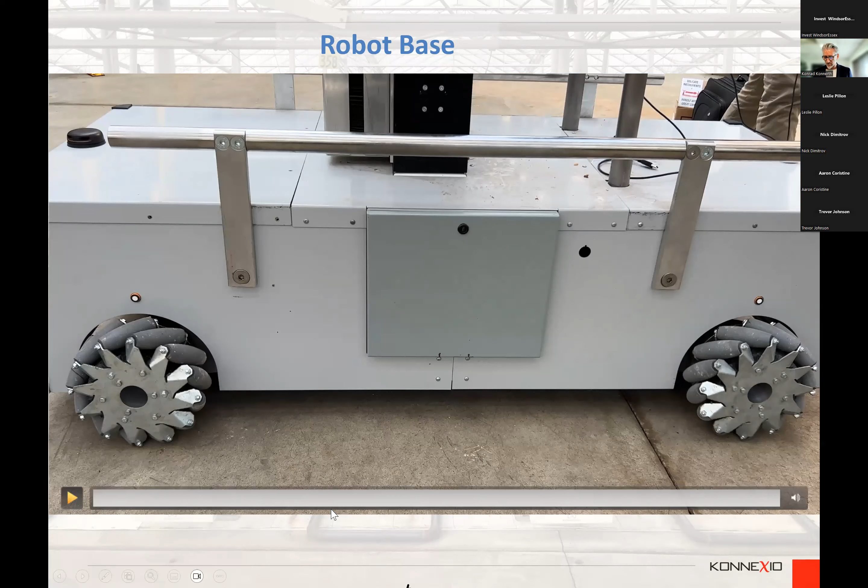Now we have a tooling mast. Like I said, we want to make sure we can support any kind of applications in the greenhouse that go up to 15 feet high, but also collapses down to 7 feet, because at least in some growers they have infrastructure built in at the beginning of the aisles, and you need to fit underneath to get onto the rails. So we want to make sure we can collapse to 7 feet but then extend all the way up to 15 feet to tend to the plants at that height.

The mast, of course, also has to be very strong. It has to have a lifting capacity of around 100, maybe 150 kilograms in that neighborhood. And then what we want to pay attention to, because we know everything grows very tightly in a greenhouse, it can get very narrow - we want to make sure the main cabling and all the wiring is actually on the inside. So it was a challenge to combine a compact design but yet have enough space to get all the wiring through the center of the mast and keep it all safe, because otherwise we were afraid certain plants may rip it off, or there may be some issues with that. So we paid a lot of attention to those things in trying to develop this.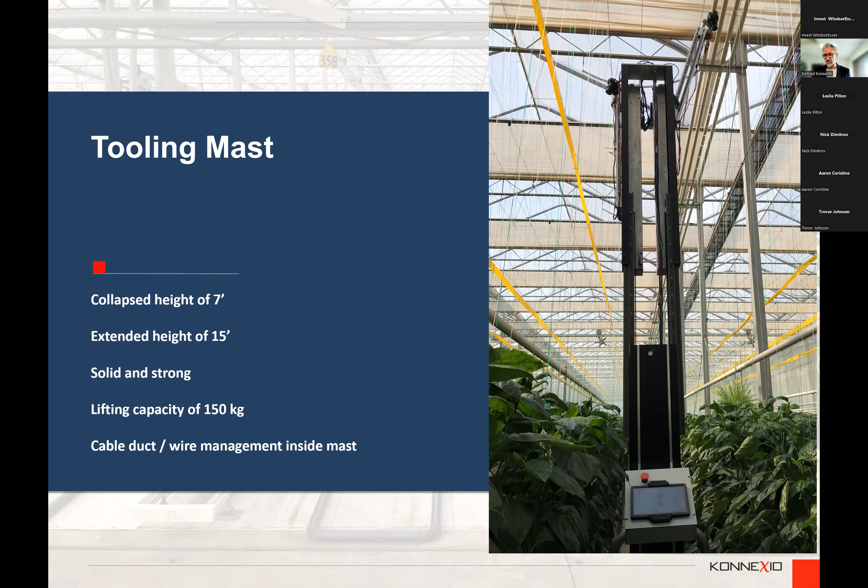I'm showing you here a little bit of a video of how it actually raises the mast. So on the HMI, you can tell it how high you want it to go, to what level, and then it will just raise up to that level and then stop, basically.

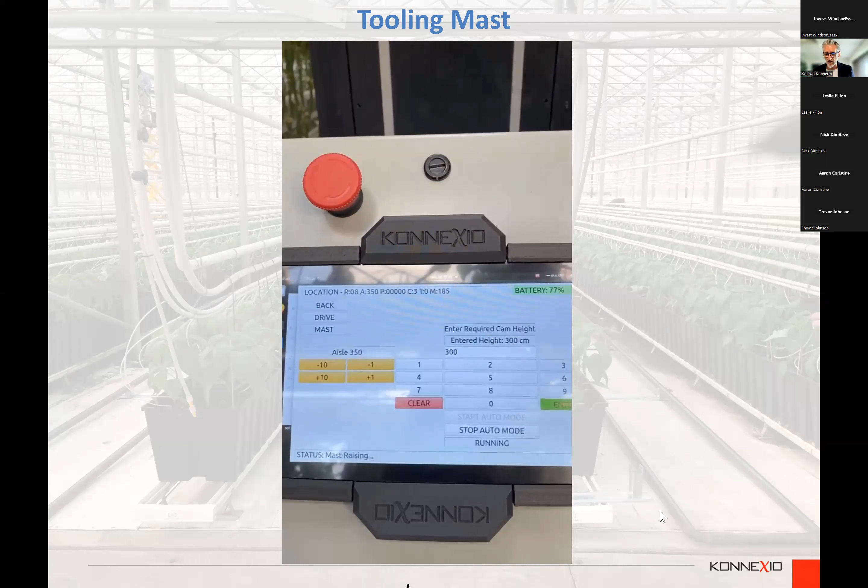It can, like I said, this is only going half high right now at the moment, but it will go up to 5 meters, 15 feet.

And this is kind of the tooling mount. So we actually also thought about different applications down the road, not unlike Adapta, what we've done in the past, where we didn't really know exactly what the final application always will be. We want to keep it open enough that it could be usable. We thought about the tooling mount, so it has to be applicable to many different applications. It had to have a full tooling face, not just a specific tooling point, because then I have more options to mount it on. I can mount different toolings on here.

In this picture, you're actually seeing a scouting operation. And this scouting operation is actually on a specific slide to go even higher than the 15 feet, so it goes to 17 feet high, just because we need some additional height. The reason was we wanted to be over top the plants for scouting. So you can mount a whole slide on there, you can mount certain points on there, but they're customizable, and you have different tooling options that can fit on them.

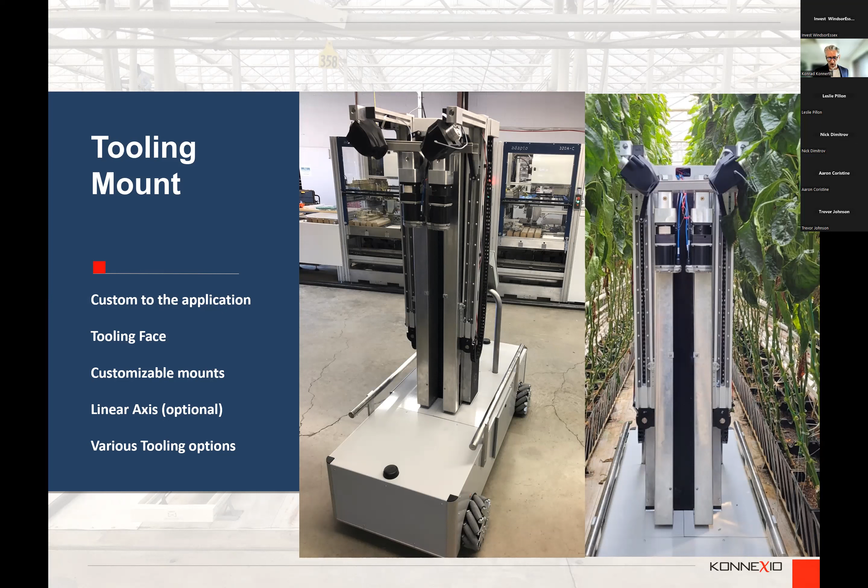So basically what we're thinking of, there are, of course, many different applications. Right now, we are testing out a scouting application that is actively being done in the greenhouse right now. We're developing this with a partner company, because we don't really think we want to be the specialists for everything.

But we want to be handling the robotics platform, maybe something like yield evaluation, but even there we're open to working with other companies. The picking, we want to get into logistics and getting the produce from the picking to the greenhouse, to the packaging area, and things like leafing, deleafing, and so on. Any kind of handling and robotic applications, we probably want to handle or be involved in.

What we're of course looking very much for partners on are things like scouting, pollination, stringing - like with Innovation, we'll be talking about, like Dennis mentioned, that we'll be meeting tomorrow, for example. We want to see how we can work together on this application, targeted disease management, and so on. But also on the other side, on Brian Hendel's side with IPM, to find out how we can work together, because we don't really want to do all the data logging and all the other side of it. We think there's a much better way to work together on these sites.

Yeah, thank you, Konrad. Definitely an excellent, robust platform developed for the agri sector. Leslie kind of suggested a collaboration, which is excellent to hear - you're both partners and working with IRAP. Thank you again.

I do have a couple of questions for you. As you're developing a platform, have you or are you planning to develop an API, an application programming interface, so that integrators can use your platform?

Absolutely, yeah, for sure. We're just a little bit early right now in the stage. We're trying to make sure we get our robotics side of it going, but yes, we will definitely have to develop that - we're just having discussions with Leslie and with Brian and so on to get more into the details. We have to find out how do we develop these next APIs to connect to those systems.

Yeah, okay, thank you for the answer. Aaron, anything on your end? Yeah, I think this is some really great technology, and clearly some strides have been made in terms of the benefit on farm. In terms of the ability of what it could do at farm on the activity side, do you think that it could get to the point where it could do trimmings and pruning of plants as the plant is growing, to further reduce the labor requirements on that side of the crop maintenance?

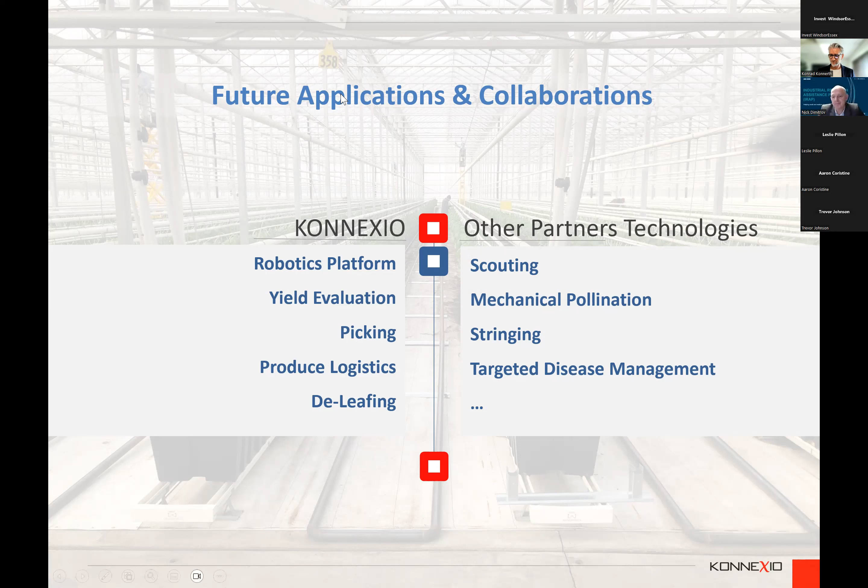Well, thank you. This sure took us on quite an information journey, everyone. A big thank you to our three presenting companies for such an informative and resourceful session. There are so many helpful examples here, from how to, or don't do, or did you think about this. There are some interesting and scary trends too. It's an amazing awareness of change that's coming down the pipe, how to adapt, how to innovate, and where to find really good solutions. This is really emerging technology at work that saves both time and money. So thank you, Brian, Leslie and team, and Konrad.